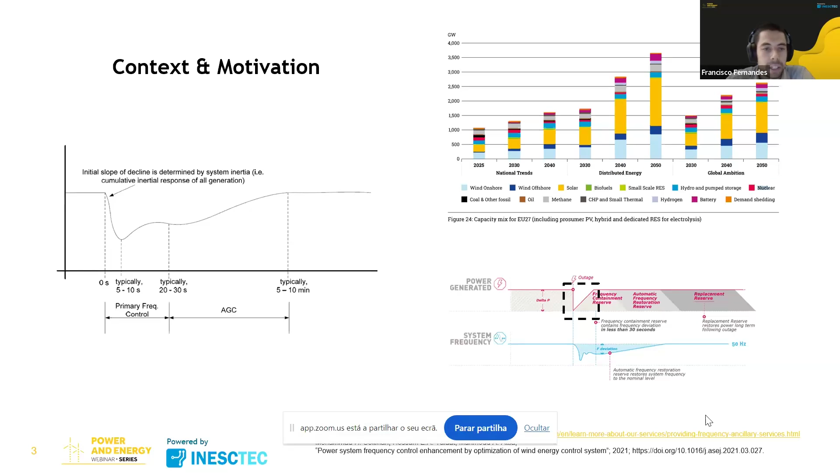So basically we wanted a model that would allow us to study these effects. Not only how the frequency stability would evolve, but also a model that would allow us to understand better if the reserves we had, the type of frequency reserve we had, were enough, or if we needed something faster, new reserves like synthetic inertia or fast frequency reserve, to get a frequency behavior that would be, let's call it, secure or good enough for the operator.

So basically, we started with this. This is a physics-based model whose constants and parameters are tuned given real system responses.

This system considers two equivalent control areas, one for the Iberian Peninsula and one for Central Europe, where each area is represented by an equivalent equation of motion, representing the inertia and its damping, and also a primary frequency control equivalent loop, where we have the behavior of different technologies like coal power stations, hydro, and so on. These behaviors include the behavior of the speed governors and the turbines of these types of technologies.

We use state-of-art models like TGOV1 for coal power stations, for instance, depending on the type of technology. Then, to model the interaction between both control areas, we use a synchronization coefficient.

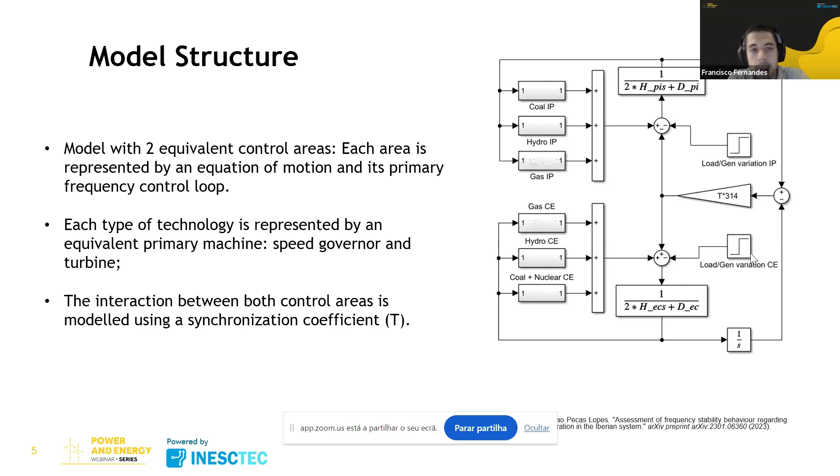So this was basically the model structure that we started from, but keep in mind that we didn't have the real parameters to represent the real system behavior. So we just had a model with a structure, but we still needed to estimate the parameters to make sure that this model would give us a response equal or close to the real system response.

So basically what we did was we estimated these parameters. As you can see, these are quite a few parameters to estimate. So basically what we did was we started from a reduced model, which was kind of equivalent in terms of response.

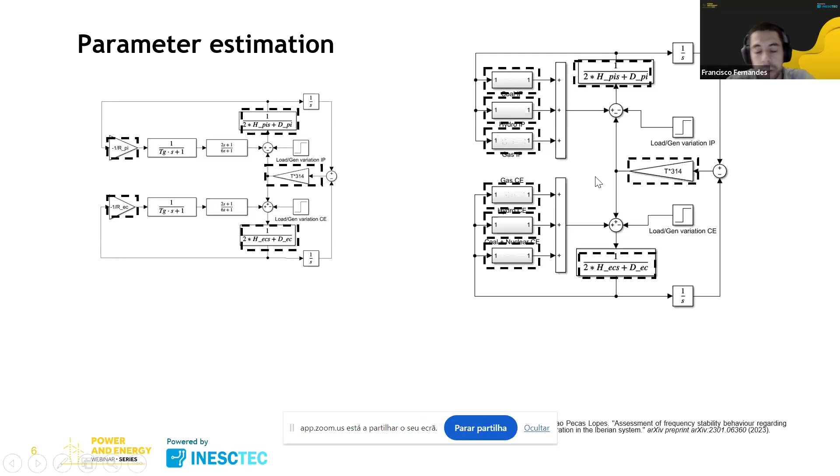And we did the larger exploration part of the space of parameters with this model. And then we came back to our large model to do, let's call it, a calibration.

How did we estimate this? Well, basically we tried to fit our model response to the response of real system events. And for that, we use a variation of a PSO algorithm, which uses a chaotic descending inertia weight in the movement equation.

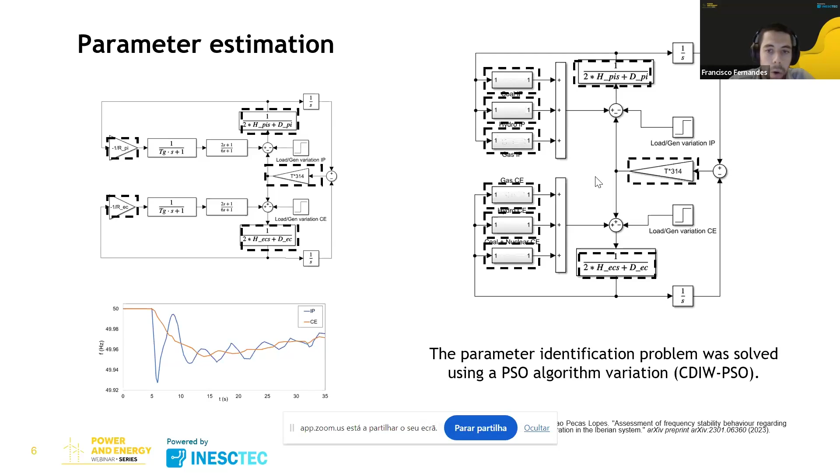So from here, basically, we have a model that will give us a response of the frequency of the system in response to large disturbances that was very similar to the one that the real system had. But basically, it only considered conventional technologies like hydro, coal, nuclear, gas.

So knowing that for the next few years, we would have the provision of the frequency service by other providers, namely converter-based generation, we also had to consider this in the model.

For that, we basically considered it in a performance-based way, let's say, mimicking the response of the real controllers. We introduced the effect of the converters via a simple transfer function, and we also introduced a measurement delay, which is typical due to the measurement of the frequency in these types of units.

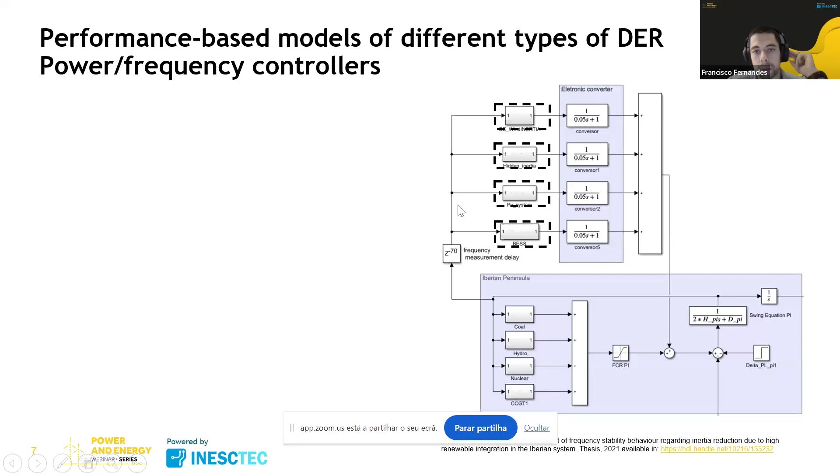We consider here different types of power frequency controllers. The first one would be what is required by the grid codes of today in terms of frequency sensitive mode of this type of converter. Then we also introduced a fast frequency reserve and synthetic inertia.

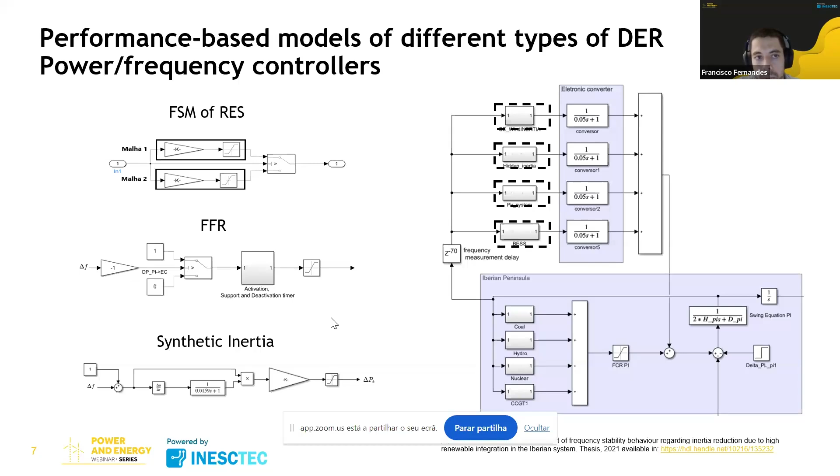So from here, basically, we had a model where we had the behavior of our real system, let's call it, and we also had the ability to test different types of new power frequency responses, let's call it. So then this base started being used in different projects.

The first one was simply an assessment of the frequency stability behavior in Iberia, and what we found was that this model was pretty lightweight, so the system response could be computed very easily and very fast. So we could map, for instance, the frequency stability indices like Nadir or RoCoF for the whole year, which we did here.

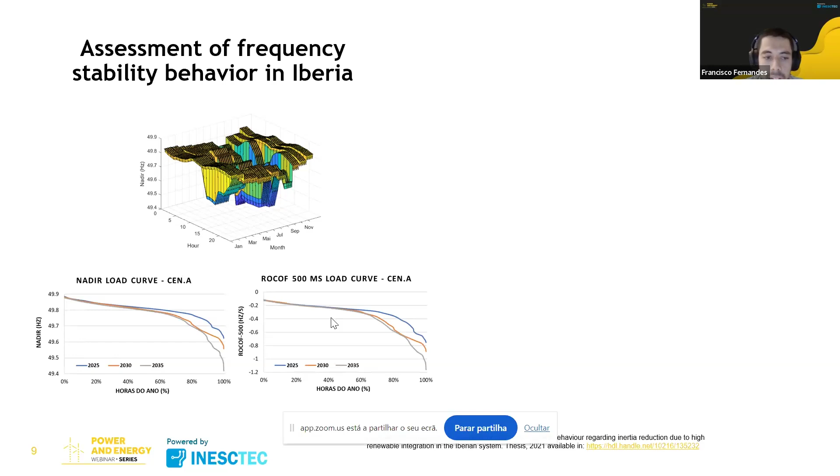And we could get, for a certain disturbance, what would be the load curve of those indices. In this case, we have the load curve, for instance, of the Nadir and the RoCoF for different years. Basically, this is interesting because you can understand for how much of the year the index may be below a certain threshold.

It may be easier than doing the reserve sizing or so on. We also used this later to understand how we could change the trajectory of these indices in the next few years by including these new types of frequency support services like fast frequency reserve and synthetic inertia.

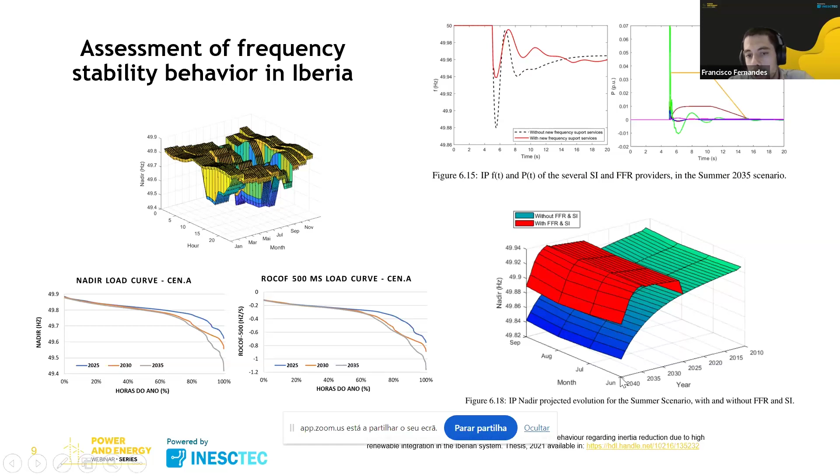And that's it. Basically, we're able to understand how the trajectory will evolve by including this type of services. So this was basically the first use of the model.

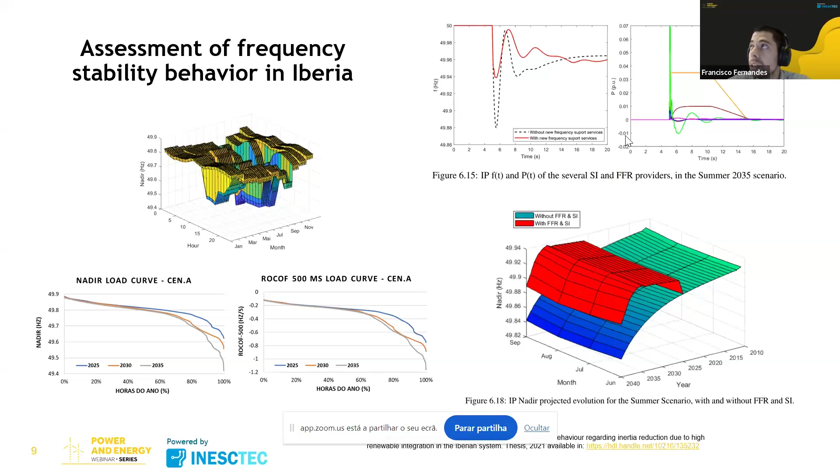But later it was used to test, let's call it, different technologies. The first was a work performed by Fernando Ribeiro, which was testing the provision of frequency service by hydrogen electrolyzers. So basically, we have an additional loop

that considers the hydrogen electrolyzers. In fact, the hydrogen electrolyzers here are represented by a ramp limit that is depending on the technology and by a signal delay. And then we have the typical control loops for the different types of frequency support service, let's call it.

So frequency containment reserve, synthetic inertia, and fast frequency response. This is also very interesting work. In the paper that I mentioned, they do studies up to 2040 related to a fleet of hydrogen electrolyzers in the Iberian Peninsula, where they study the impact of the ramp rate limit of the electrolyzers on the stability indices, in this case the RoCoF. So yeah, this was a second use of the model.

This was also used in the context of the XFLEX Hydro project, where basically the provision of frequency regulation service from hydro units equipped with extended flexibility solutions was tested. Here, they also tuned typical state-of-art models for hydro units with real responses, getting a more precise response from hydro units, and tested the provision of different frequency control reserves in these new hydro units.

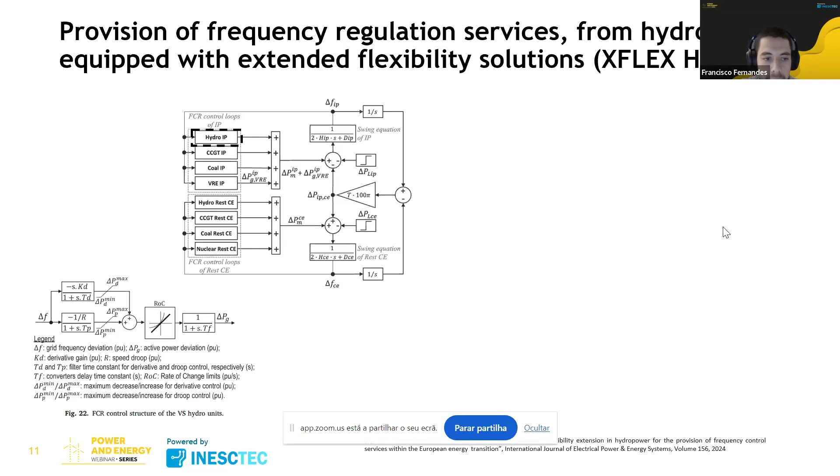In this case, the idea was basically the same, but considering that this support service would come from hydro units. They also did a very interesting analysis about the amount of reserve needed to get an improvement of 0.1 Hertz on the RoCoF, depending on the type of inertia required, whether synthetic or synchronous inertia from hydro units. It's a paper that I think is very interesting.

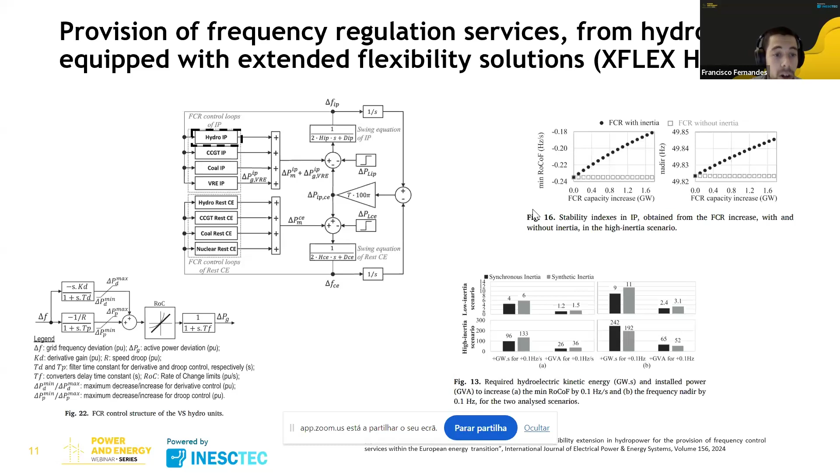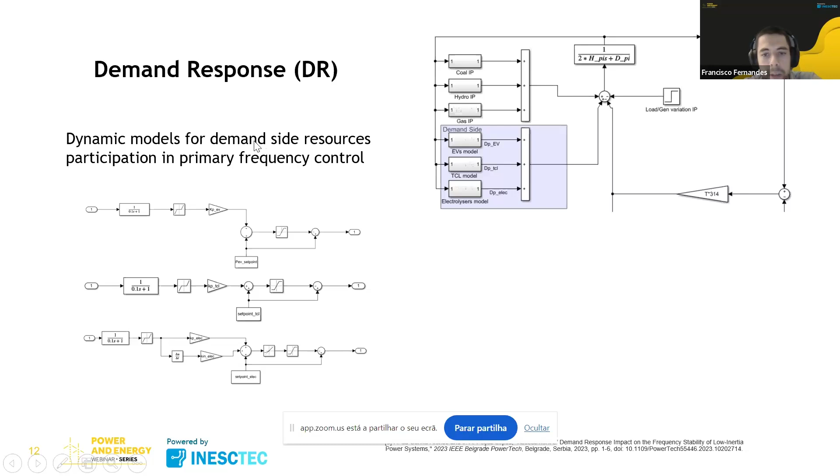Then later on, we also included demand response in the model. This was work done by Rodrigo Afonso. Basically, they consider the effect of EV models, thermostatic controlled loads, or even electrolyzers on the response of the system. So basically, after these three use cases, we got the ability to represent a lot of different types of responses and behaviors, very diverse, let's call it.

Regarding the first part of the frequency response, so the containment and the inertial response and so on, these were the developments we did on the model. But later on, we also included the secondary frequency control loops. In this case, we separated the model, separating the Iberian Peninsula model into two, so we had Spain and Portugal instead of one single control area.

This was a requirement of our project at the time. And we included a very simple AGC control, where you had a proportional integral controller that would give a set point, then split into the different technologies depending on participation factors, always respecting the ramp rate limits of the different technologies.

This model was then used to study things like the inclusion of battery energy storage systems in the provision of the automatic frequency restoration reserve. Effectively, we found it interesting studying things like the stabilization time of the ACE and how batteries could enable a much faster service compared to conventional ones.

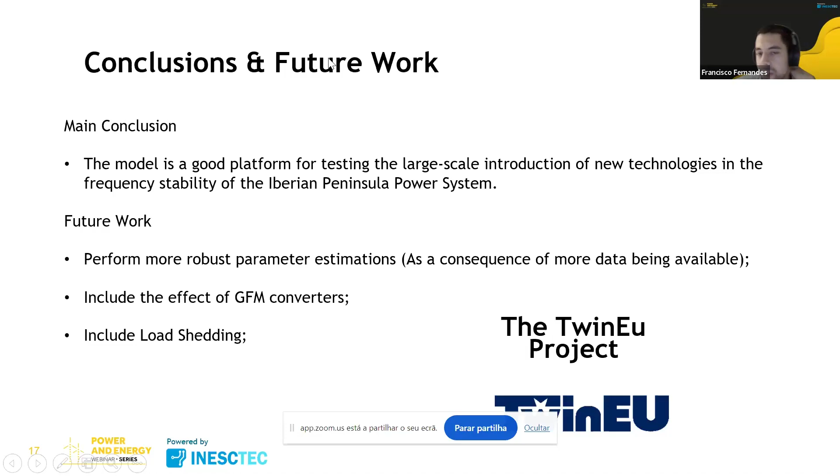And I think this is it for me. Thank you very much for your attention.

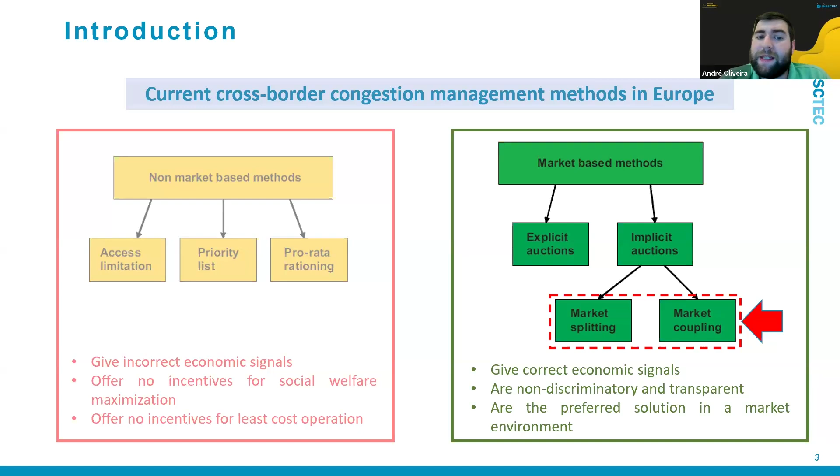Therefore, in matured electricity markets, the most well-established congestion management methods are the market-based methods, since it is accepted that they provide greater liquidity and transparency compared to non-market-based methods.

The objective of my research is to develop a new model to represent how energy and reserve capacity mechanisms could work together, considering the main different EU price areas.

For this, we are developing a simplified model for the optimal allocation of the capacity of the transmission interconnection lines among energy, reserve, and security margins for different price areas, considering both commercial energy exchanges and a simplified approach to reserve modeling.

We are only considering the automatic frequency restoration reserve and not the manual, since the automatic directly affects the energy dispatch due to the need of reserving the committed regulation capacity.

We will then apply the developed model into a market model already in use by INESC TEC called CEVESA, to simulate some scenarios and draw some conclusions.

Picasso is already an existing mechanism to coordinate secondary reserve across European countries. Our goal is to study how this coordination affects electricity markets, mainly focusing on the Iberian market.

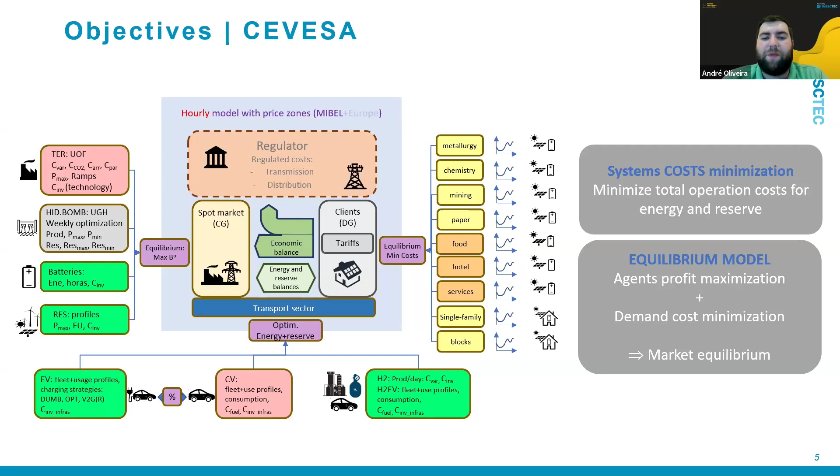Renewable generation and other non-dispatchable technologies are represented by their generation profiles. This model solves an optimization problem that minimizes jointly energy and reserve operation costs, and can also resolve an equilibrium problem that minimizes energy and reserve operation costs while maximizing agents' profits.

So let's understand how capacity allocation works and how markets use the different line capacities. The physical line capacity can be divided into the TTC, the total transfer capacity, and the security margins.

The TTC represents the physical limits according to security rules, such as thermal limits, voltage limits, and stability limits, which does not lead to network constraints in either system. This is if future network conditions and generation scenarios were perfectly known.

The TTC is divided into the net transfer capacity, the NTC, and the transmission reliability margin, the TRM. The TRM covers forecast uncertainties due to imperfect information, and the evaluation of the TRM can be done by the TSOs according to past experiences, or by using some statistical methods, for instance.

We are left with the net transfer capacity, which is the expected maximum volume of generation that can be transferred through the interface between the two systems, which does not lead to network constraints in either system, respecting some technical uncertainties on future network conditions.

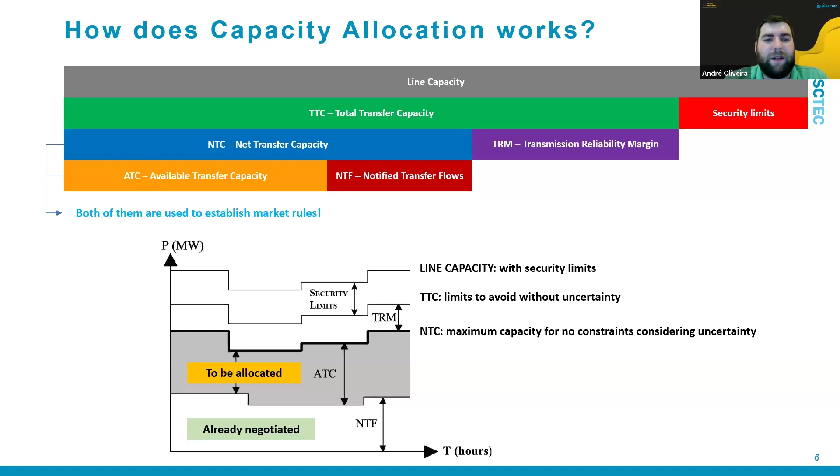Both the NTC and the ATC are used to establish market rules, and so for our research, as we are modeling both energy and secondary reserve markets, we'll make use of the public data of NTC.

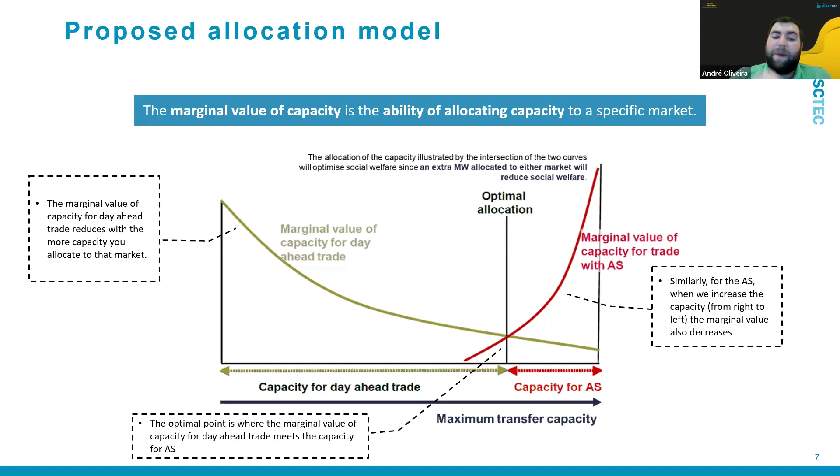Our research is intended to model this problem, allocating capacity for both energy and reserve on an hourly basis. For this, we had to study how capacity can be allocated in respect to energy and reserve. As energy flows from one zone to another, so can reserve be allocated in one direction or another. Therefore, it is of the utmost importance to understand all the possibilities with upward and downward reserve allocation and the direction of the energy flow on an hourly basis.

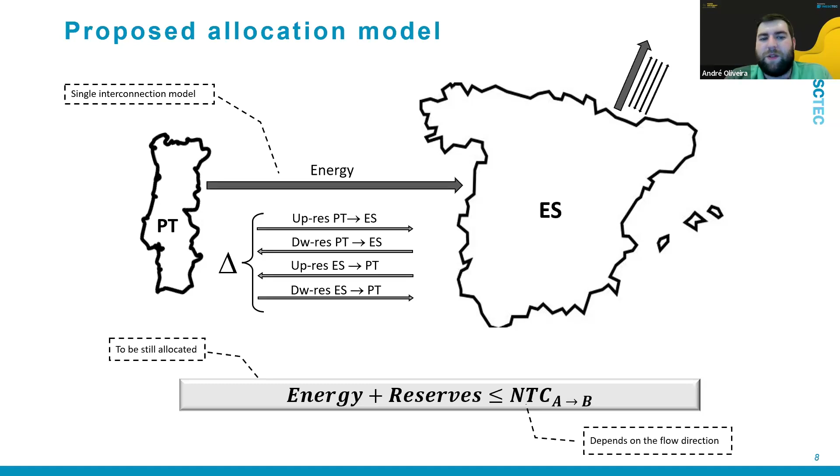For instance, one restriction of this problem is that when energy flows from Portugal to Spain, and we want to reserve capacity for both energy and upward reserve, it cannot surpass the NTC from Portugal to Spain.

So our proposed allocation model is as follows. We have these two restrictions that constrain the energy and the upward and downward reserve allocation to the NTC from a zone A to B. To better illustrate this, we can look at the figure on the right.

Considering the NTC from Portugal to Spain, we have to size the allocation of energy and reserve accordingly. When Portugal gives upward reserve to Spain, it cannot go beyond the NTC from Portugal to Spain, and that also considers the energy from Portugal to Spain.

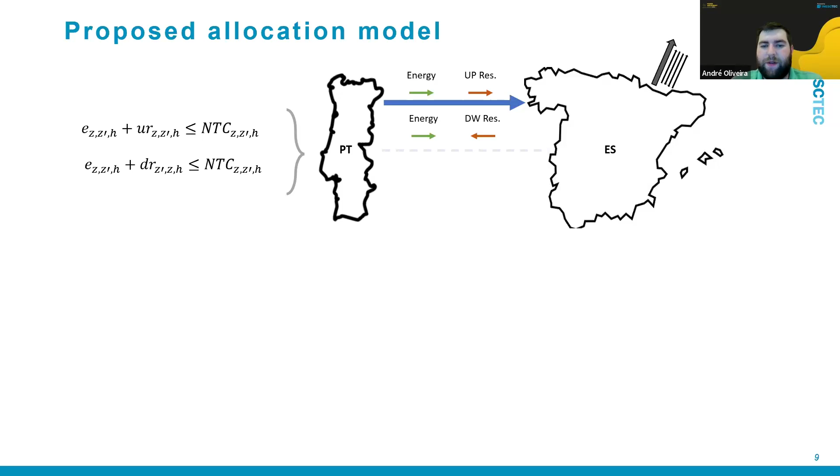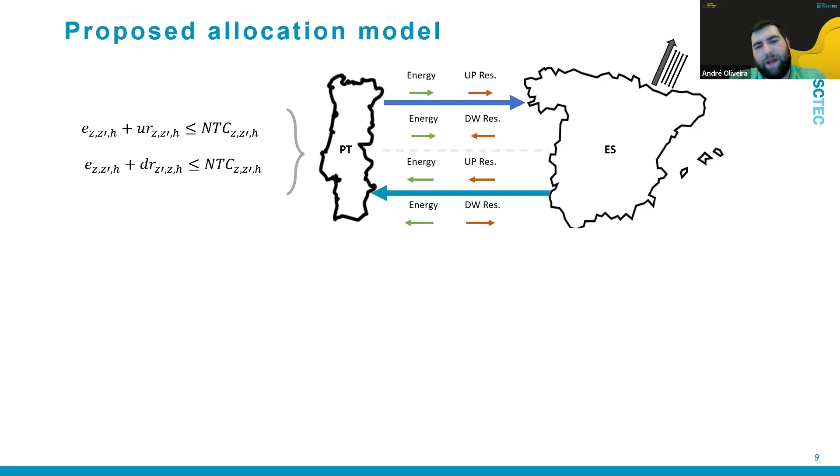When Spain allocates down reserve to Portugal, we also need to take into account the available NTC in the opposite direction, this is from Portugal to Spain. Similarly, the same question applies to the NTC from Spain to Portugal.

Not only do we need to model the interconnections, but we also need to take into account the sizing of units to handle reserve allocation interaction between zones. Therefore, we added new terms to the existing constraints we had on the model to achieve this principle. To better understand these constraints, I'll illustrate the figure on the left as we go. Taking into account that these constraints work regardless of the zone we are illustrating, but for the sake of simplicity, I'm only illustrating Portugal units.

The upper reserve needs in Portugal for a given hour of the day need to be fulfilled by the reserve provided by its own units, or by the imports of upper reserve given by the units in Spain. Portuguese units can also provide upper reserve to the Spanish system, meeting its upper reserve needs.

Similarly, the down reserve needs in Portugal for a given hour need to be fulfilled by either the reserve provided by its own units or by the imports of downward reserve given by the Spanish units. Portuguese units can also provide down reserve to the Spanish system, meeting its downward reserve needs.

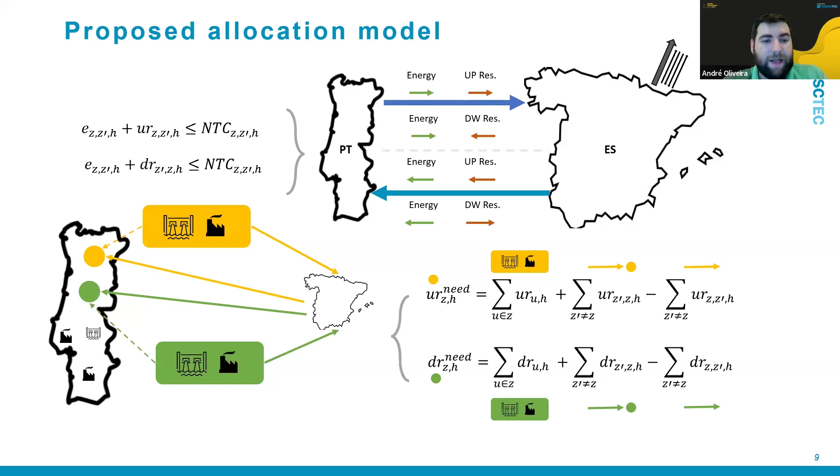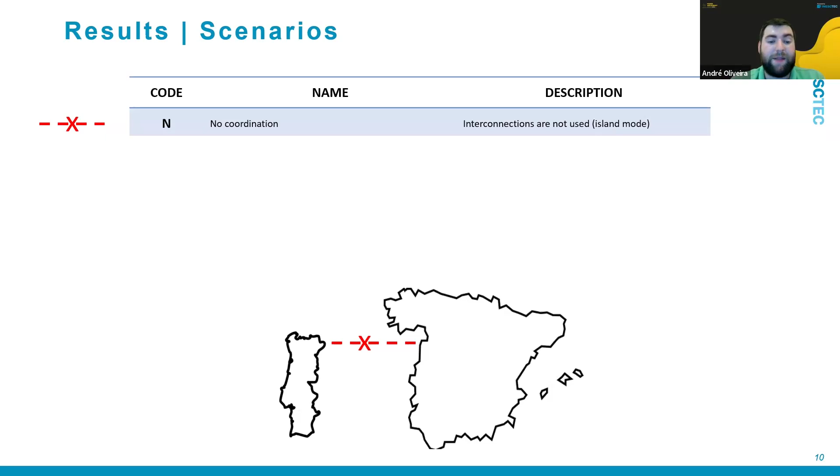To test and understand the model, we developed a set of scenarios that are detailed in this slide. The first scenario is used as a baseline, considering both Portugal and Spain as islands, disregarding completely the interconnection lines between them and disabling energy exchange.

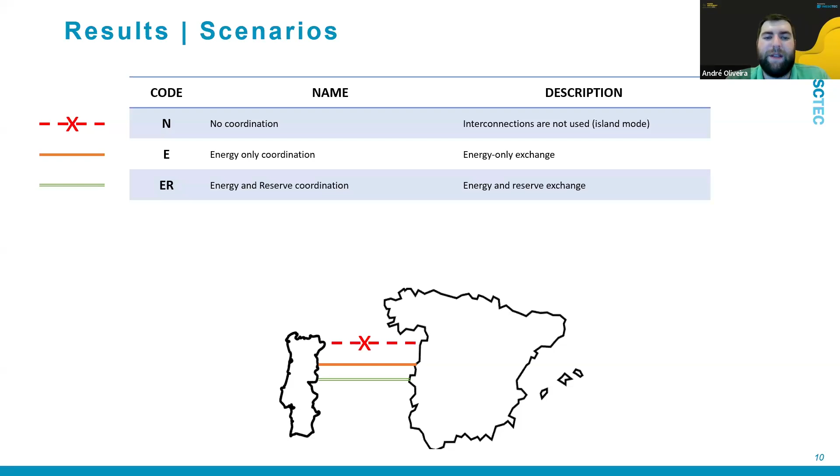The second scenario can also be considered as a baseline, or business as usual case, where interconnections between Portugal and Spain are considered, but only for exchange of energy and not reserve. The third scenario considers this proposed model and therefore allows capacity to be allocated for both energy and upper and down reserve.

The fourth scenario considers both energy and reserve allocation, but with a higher installed capacity on the interconnection lines. And the last scenario is the opposite of the previous, which considers both energy and reserve allocation, but with less installed capacity on interconnection lines.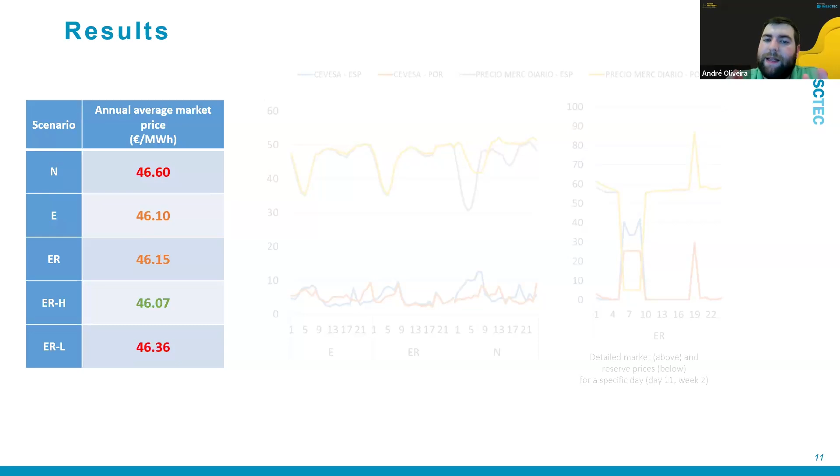Even though the average market price increases, this does not necessarily lead to higher system costs, as we'll see in the next slide. In the central figure, we can see the average market price for energy and reserve for different scenarios. The prices above are the market prices in yellow and gray, and the prices below are the reserve prices in orange and blue. It is noticeable that in the scenario with no coordination, there are several hours of market splitting in energy and in reserve, which is expected given that both zones are not coordinating and exchanging either energy or reserve.

In the scenario of energy-only coordination, it is noticeable that there is low market splitting for energy prices, and even though there is a reduction of the market splitting in the reserve prices as well, they still are not similar between zones.

Finally, by looking at the scenario in the middle, here we coordinate both energy and reserve, and it is visible that both market and reserve prices are similar with low market splitting between zones, which indicates that the coordination of both energy and reserve is working and therefore validates our model.

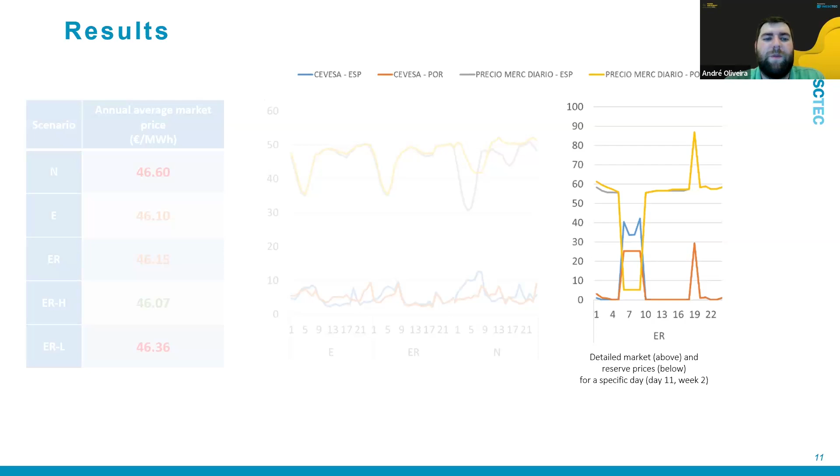Finally, by looking at the figure on the right, we can see the market price and reserve prices for a specific day. For the energy and reserve coordination scenario, it is noticeable that when the market price decreases in hours 4 to 10, it increases the reserve prices, which is a common pattern observed in the real market data. We can also observe that there is only market splitting for reserve prices in those hours, and there is almost no market splitting in the other hours.

Finally, in this slide, we show the total annual system costs by the different considered scenarios. Comparing the energy-only scenario with the scenario without energy exchange, we can see there is a cost reduction of 1.65%, which leads to savings of 3,304 million euros.

This indicates that there is a clear benefit of coordinating energy between Portugal and Spain, or in any two zones. And comparing this scenario of energy only coordination with the scenario of energy and reserve coordination, it is possible to see that there is a reduction of 0.07%, which leads to a saving of 129 million euros. This clearly indicates that coordinating energy and reserve benefits the system, as total costs can be reduced.

Furthermore, by looking at the scenario with higher interconnection capacity, we can see that this cost reduction is more profitable, leading to a reduction of 0.09%, which is 184 million euros. In contrast, when we consider less interconnection capacity, the costs grow as high as 0.03%, increasing the total costs, which clearly indicates that the coordination between energy and reserve can only be profitable when accompanied by investments in the interconnection capacity between the zones we are considering.

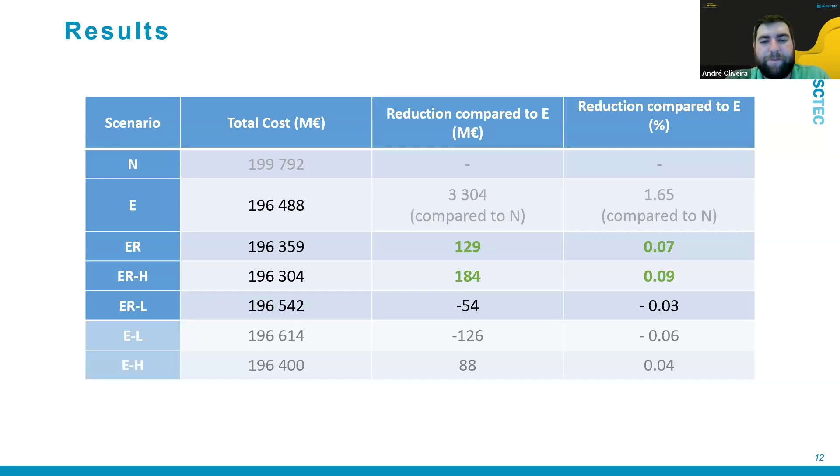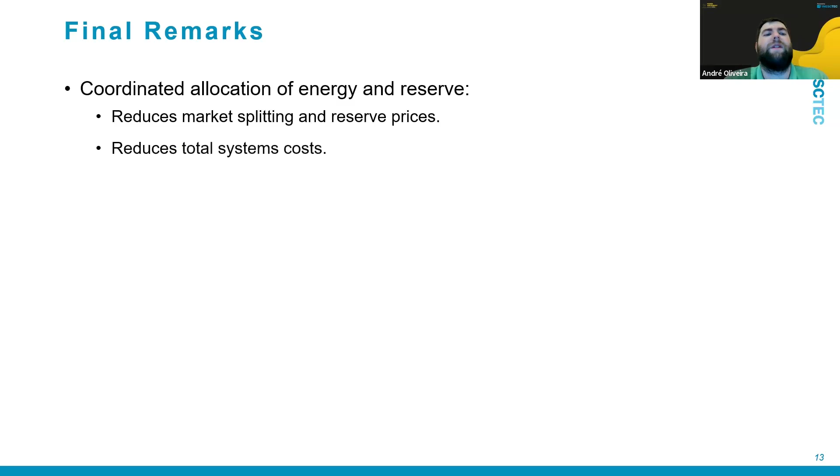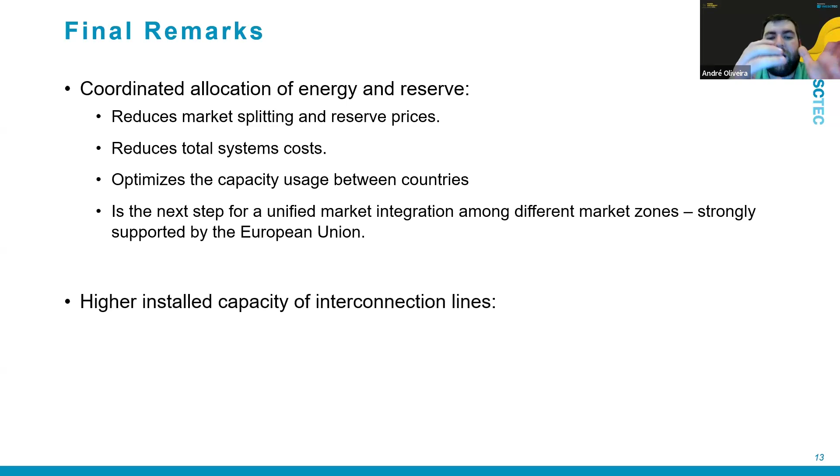Concluding, the coordinated allocation of energy and reserve reduces the market splitting in energy and reserve prices, reduces the total system costs, and optimizes the capacity usage between the countries or zones we are considering. This is the next step for a unified market integration among different market zones, which is strongly supported by the European Union. The higher installed capacity of the interconnection lines improves the coordination between energy and reserve among zones with lower operation costs, and is only beneficial up to a certain level of new capacity, from where additional capacity does not provide additional benefits.

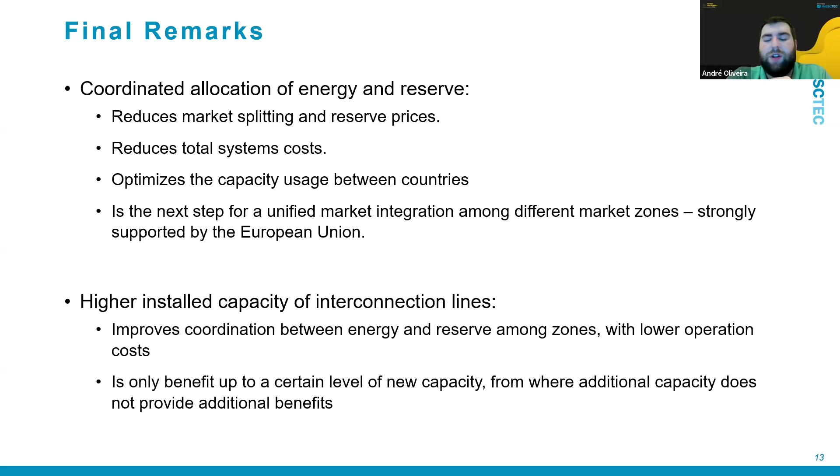Thank you very much.

Thank you, Andre. Thank you very much. Can you stop sharing, Andre? Yeah, so in this way we will be the participants and myself. Okay, so Q&A.

There is one question. It is for Francisco. Francisco, can you see the Q&A? Yes, if it's the question regarding the hydrogen plants. The hydrogen plants, yes. Please go ahead. So, let me just say, because I don't know if everybody is seeing the Q&A, the question is: did you include hydrogen plants in this study?

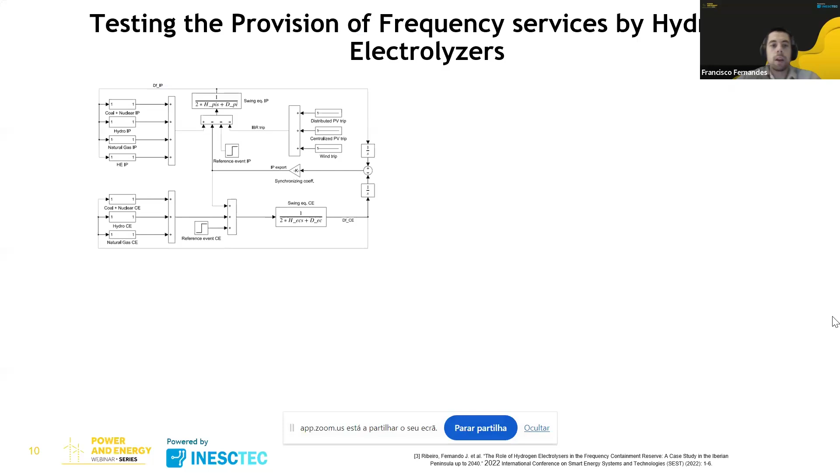So I believe in the study, in the model, I suppose. Please, Francisco. Yes, so the closest we came to that was, as I was showing, the work from Fernando Ribeiro. I can actually share my screen. This was the work specifically. This is not a detailed modeling of a hydrogen plant. In fact, what we are considering is some ramp rate limitations that would come depending on the technology.

Still, it's debatable the need for detail that you actually need to evaluate frequency stability in this sense, especially looking at it from a system point of view. But yes, regarding the inclusion of hydrogen plants, this was what we considered. Not a plant, but yeah, a fleet, I'll call it.

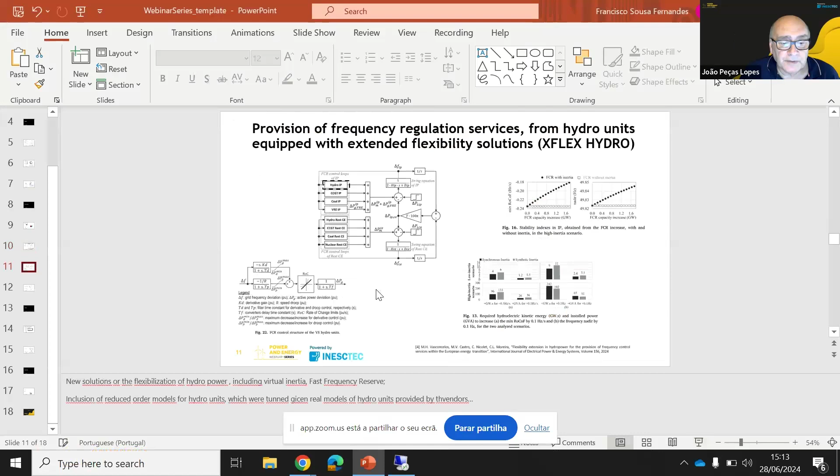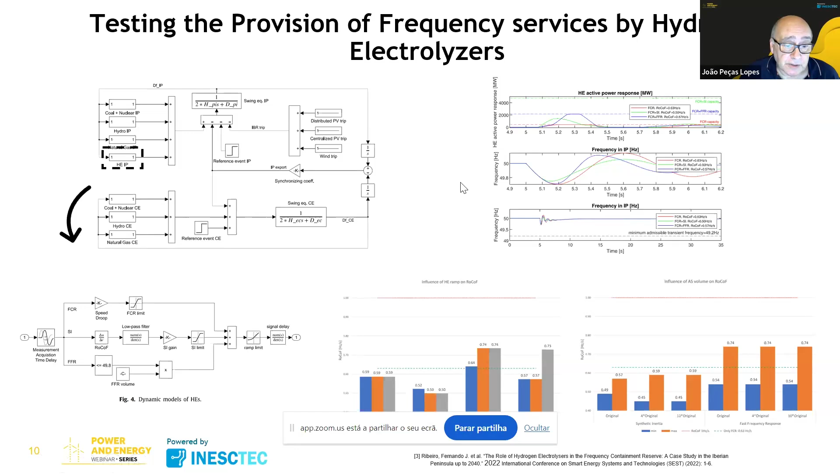Yeah, but Francisco, is it? I'm sure that it is possible to have the electrolyzers participating in frequency containment reserve, as well as automatic frequency restoration reserve, included in the AGC response, right? Yes, that's true. It's not only frequency containment reserve, the response is also at the level of the AGC. Yes, having the electrolyzers participating in secondary frequency control.

But please go ahead. No, please go ahead. No, that's true. That's true. The floor is yours. This was also something done.

But yeah, basically the model details are very similar. The thing that differentiates the electrolyzers in our study from the remaining providers of this type of service, in this case the frequency restoration reserve, would be the ramp rate at which they could change the power. So that's what would differentiate them in these studies. This was actually also done in Afonso's work. All these works I'm presenting here have a reference on the slide, so if you want to check for deeper details regarding the modeling of such technologies, you can go there. And that's it.

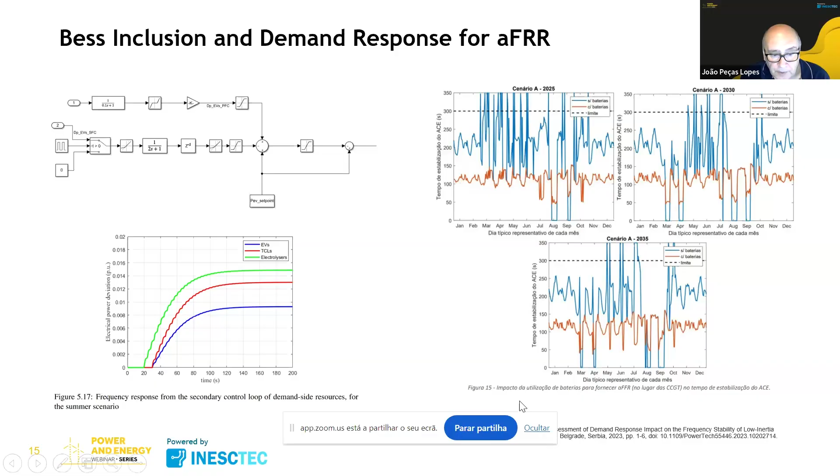Thank you, Francisco. I also have one question for you. What you showed was the use of this model mainly for developing studies that could be offline studies. But what about having this digital twin installed at the dispatch center level and trying to address online the degree of stability of the system for a given disturbance?

Can you? Yeah, that's actually what we are developing right now in the context of TwinEU. And I think that's exactly what makes it a digital twin and not a model for simulation. It's its ability to be updated online depending on the dispatch that is in place, on the load, and so on. And yes, I think the availability to use this online comes from it being very fast.

Of course we will have some previously determined parameters from the real data that we have, and these will include things like the load inertia, the load damping response, and so on. But the remaining parameters can be updated online depending on the generator dispatch that we have at that moment, and that's exactly what we are working on right now.